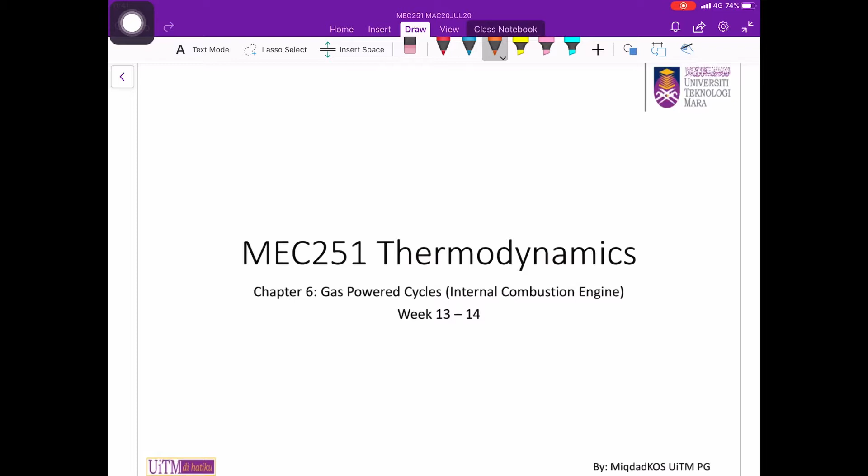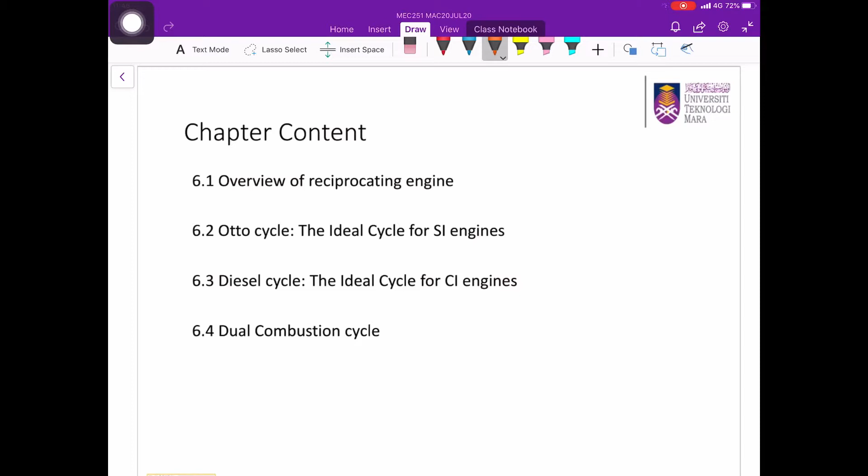Chapter 6: Gas-Powered Cycles, Internal Combustion Engines, ICE. There are 4 subchapters in Chapter 6. Subchapter 6.1, The Overview of Reciprocating Engine. Subchapter 6.2, Otto Cycle, the Ideal Cycle for Spark Ignition Engines. Subchapter 6.3, Diesel Cycle, the Ideal Cycle for Compression Ignition Engines. And lastly, Subchapter 6.4, Dual Combustion Cycle.

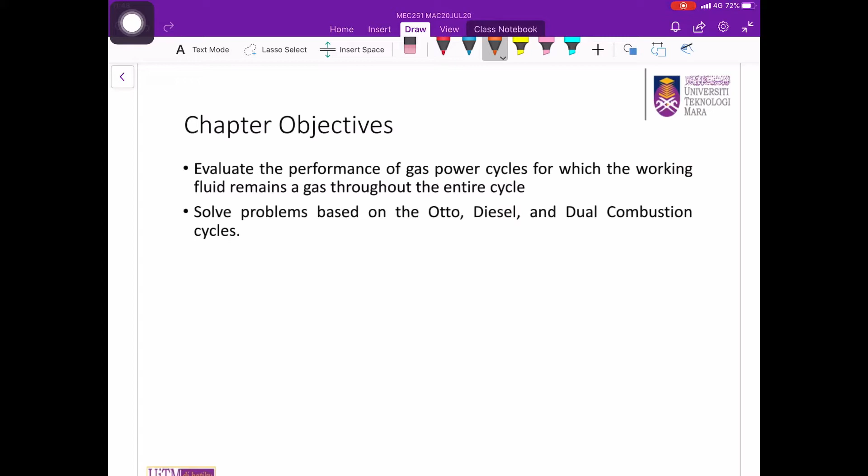By the end of this chapter, please ensure you are able to evaluate the performance of gas power cycles for which the working fluids remain as gas throughout the entire cycle, and you are able to solve problems based on the Otto cycle, diesel cycle, and dual combustion cycle.

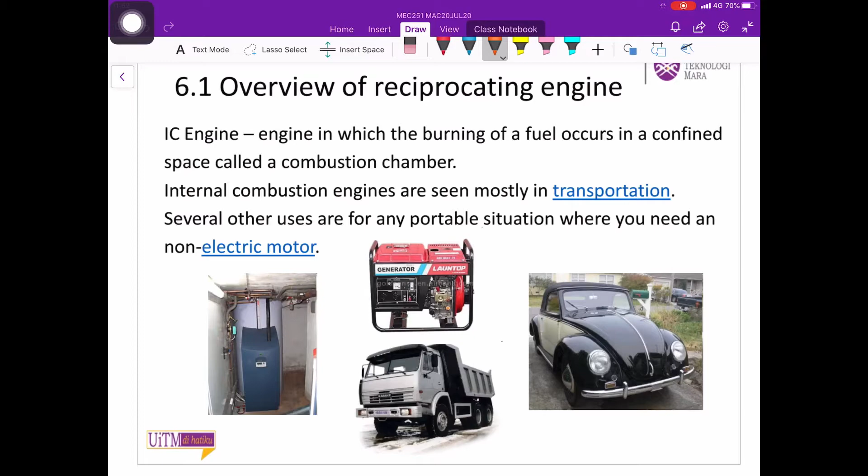In the internal combustion engine, ICE, the combustion of fuel takes place inside an engine's cylinder. The engine cylinder is a confined space, and sometimes it is referred to as a combustion chamber. Internal combustion engines are usually found in transportation. They have also been used in several other applications such as the electrical generator.

Similar to gas turbines, internal combustion engines in an actual application do not undergo a complete cycle, where there is no particular process to return the working fluid to its initial state. For analysis purposes, the air standard cycle assumptions must be taken into consideration. The air is considered to continuously circulate in a closed loop.

Throughout the processes, the air is assumed to always behave as an ideal gas. Also, the processes that make up the cycle will be assumed as internally reversible processes. In other words, they will be assumed as ideal processes, and instead of a combustion process, it will now be replaced by a heat addition process from an external source.

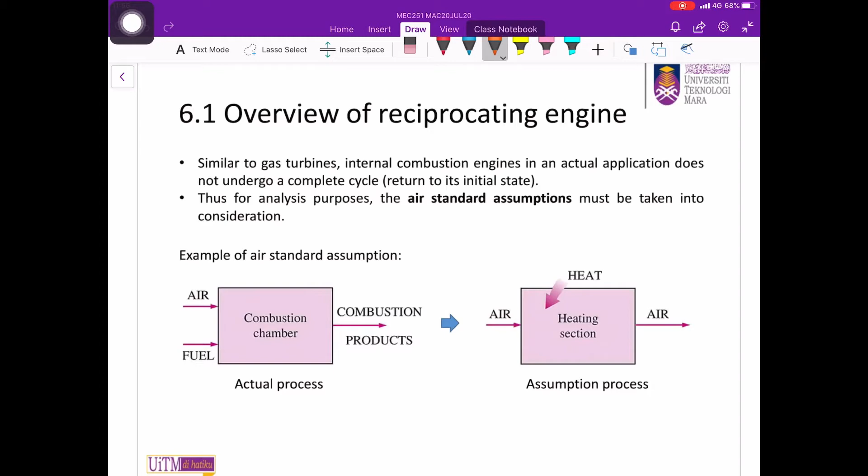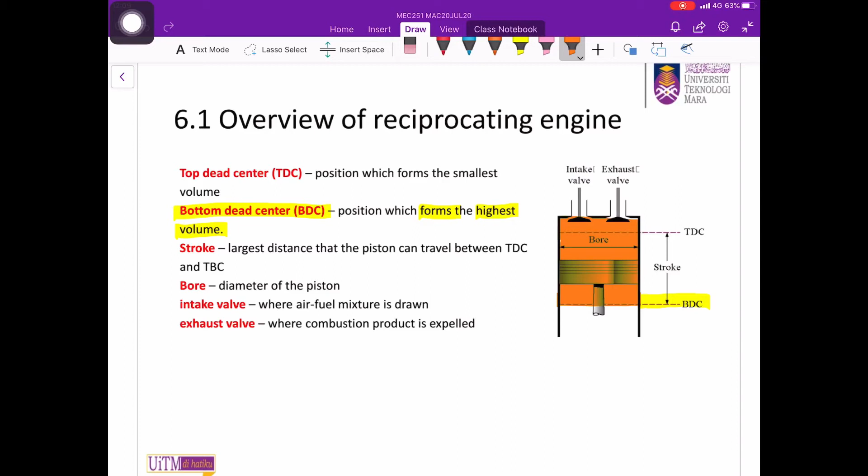While bottom dead center, BDC, is the lowest point that the piston will reach. Also, bottom dead center is the point where the piston of an engine is the nearest to the axis of the crankshaft. At this point, it forms the highest volume inside the cylinder. Movement of the piston from the bottom dead center to the top dead center or vice versa is called stroke.

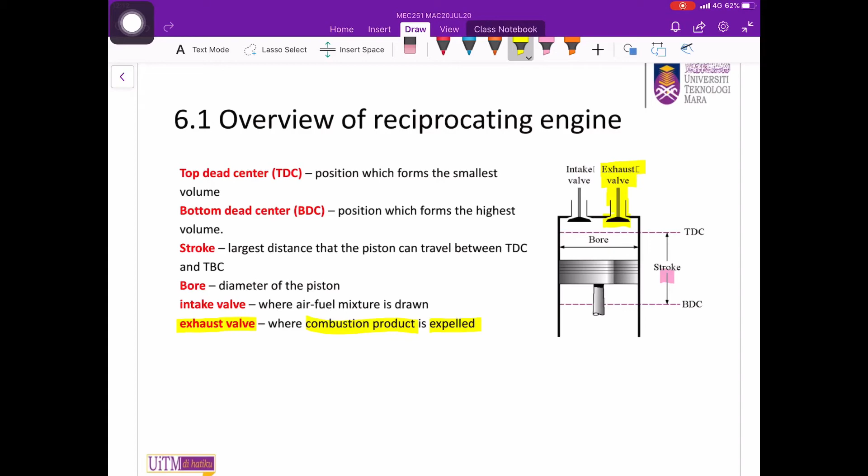The intake valve will be used to supply the fresh air or mixture of air and fuel. An exhaust valve will function to exhaust or reject the combustion products leaving the cylinder. The displacement volume is actually the displaced volume between the top dead center and the bottom dead center. Meanwhile, the clearance volume is the volume where the piston cannot travel. It will be the minimum volume inside the cylinder.

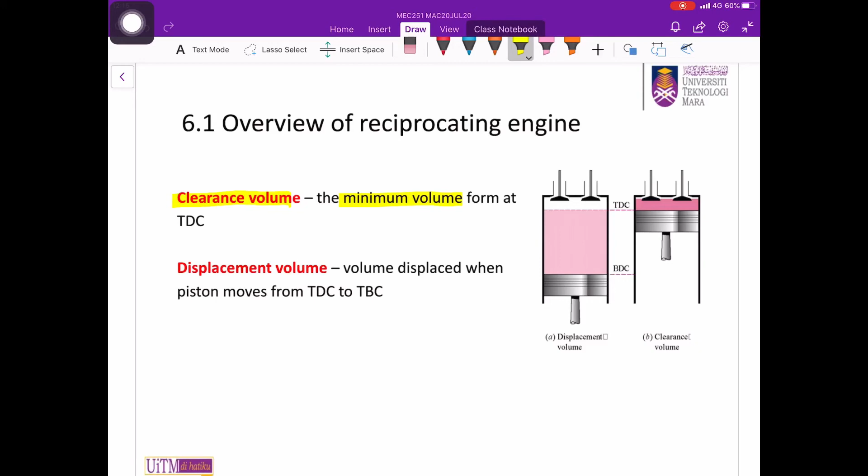The compression ratio, rv, is defined by the ratio between the maximum volume, represented by the volume when the piston is at the bottom dead center, to the minimum volume, represented by the volume when the piston is at top dead center. The mean effective pressure, MEP, is a fictitious pressure that, if it operated during the entire power stroke, will produce the same amount of net work as the actual cycle.

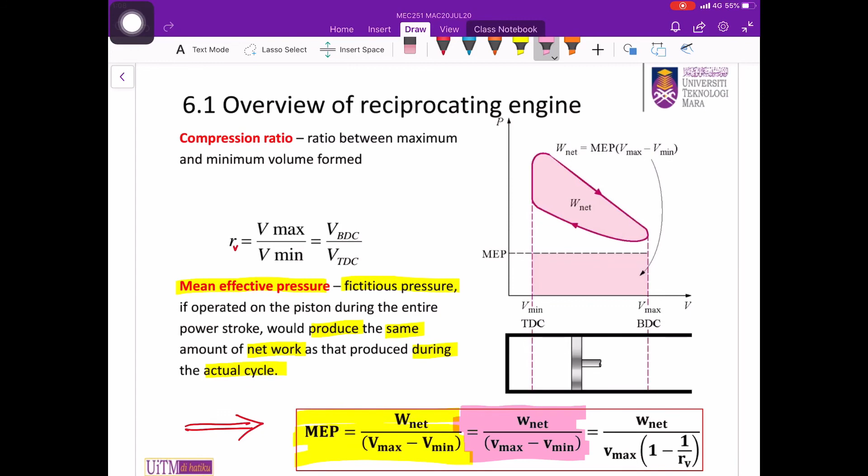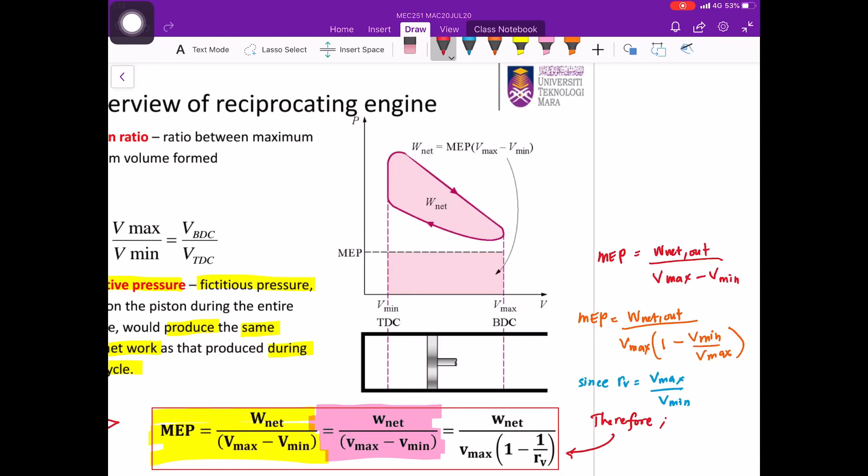The mean effective pressure, MEP, can be formulated as MEP equals work net out divided by maximum volume minus minimum volume. This expression can be used to find the mean effective pressure by using the specific properties. We can also have another expression for MEP with respect to the compression ratio, rv.